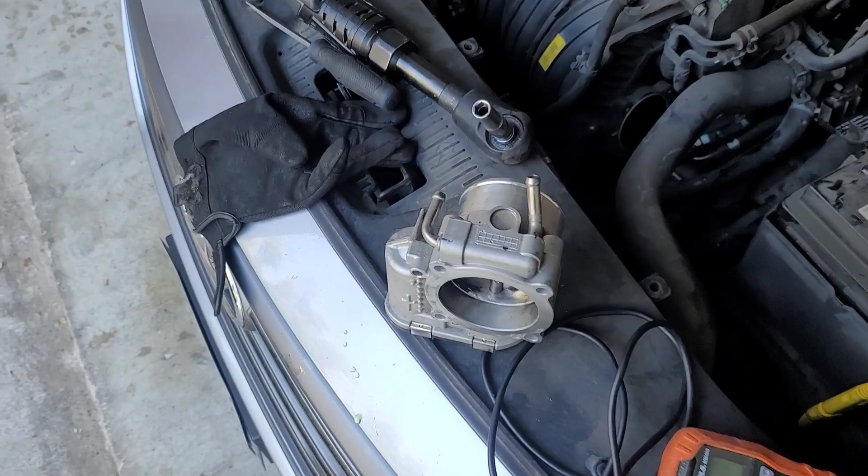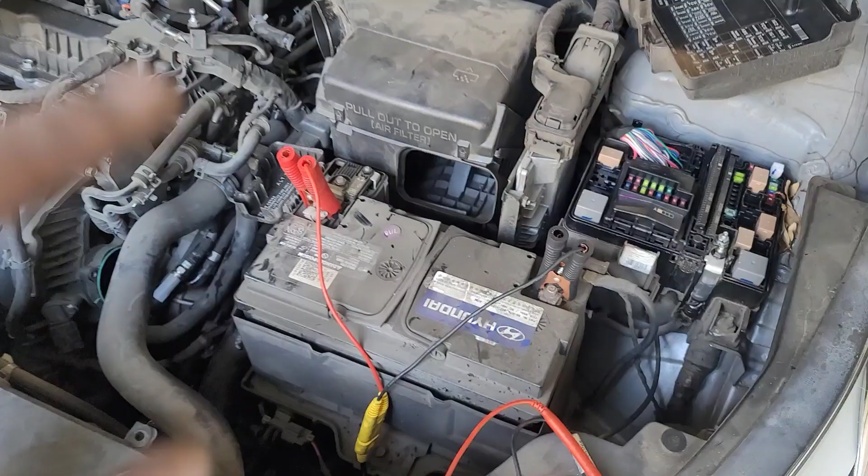Today we got a 2016 Hyundai Sonata. As you can see, it's kind of taken apart a little bit, and I got the electronic throttle body right there. And this is what we're trying to tackle today. Customer complaint is she was driving the car, all of a sudden check engine light came on, and she lost power. The car would not move past 15 miles an hour.

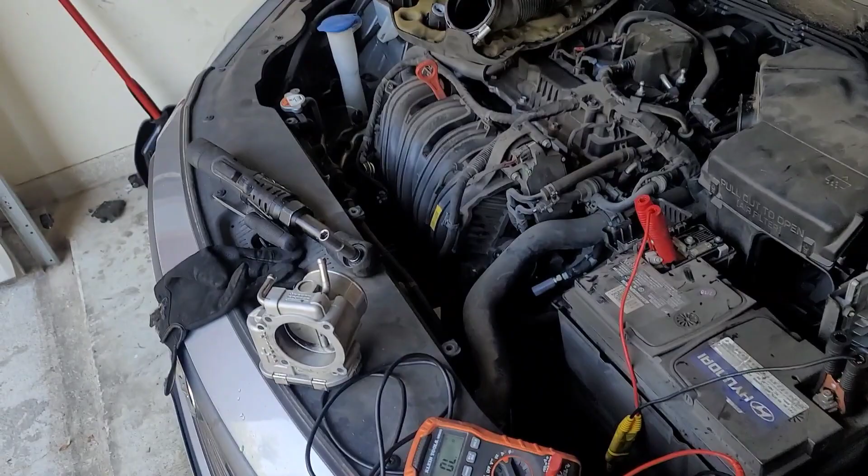So I came down there, scanned it for codes, got a P2118. So I got into service information. First of all, I did some actuation tests, and we're going to go over that very quickly. So normally, even with the car not running but ignition on, you should be able to actuate the throttle body through the pedal, of course. So when you press the pedal, you should see the throttle angle change.

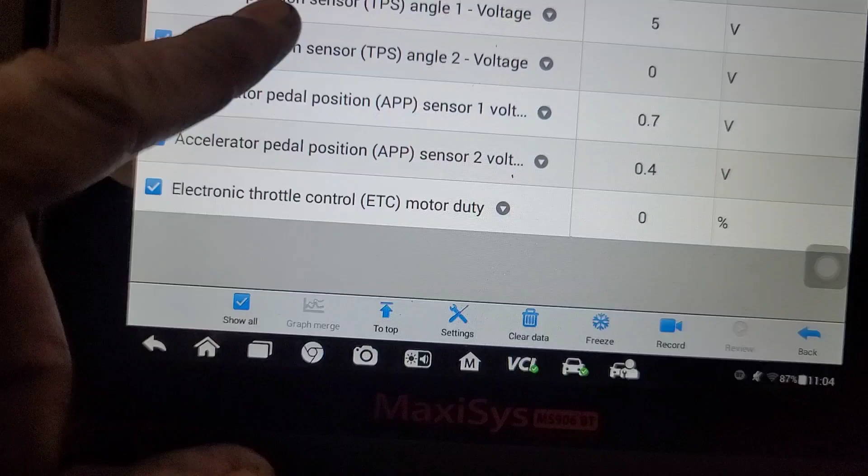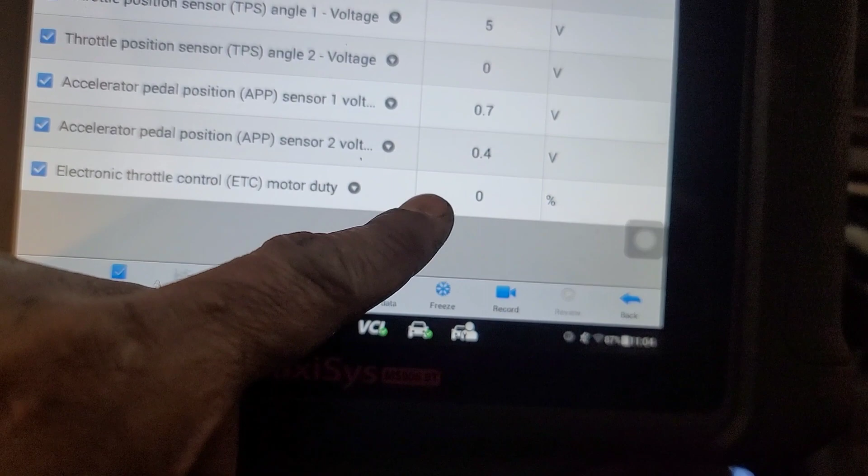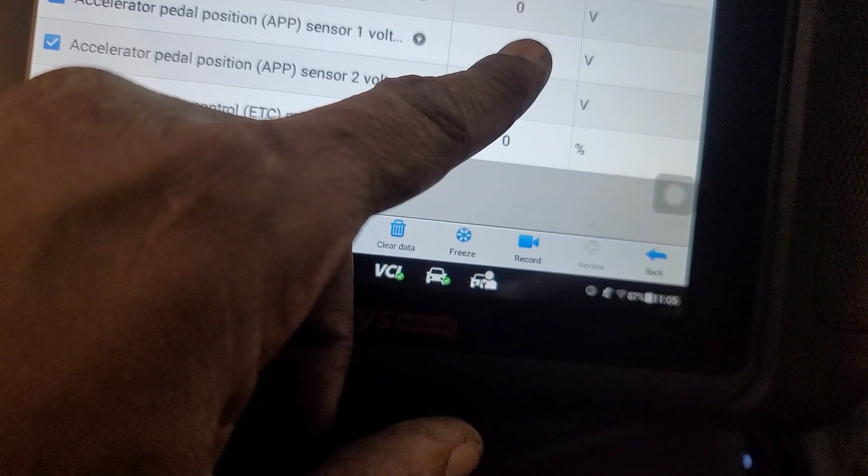So here we got all the pieces that I may need for that. I got the TPS angle 1 and angle 2, which go opposite of each other. One is starting from 5 going down, the other one from 0 going to 5. We also got the accelerator pedal that does the same thing pretty much, from 0 volts going towards wherever it's going. And okay, this is going from 0 to 2, and this is 0.4 to 2, and I think this one is going 0.7 to 5. Either way, we're going to check that out.

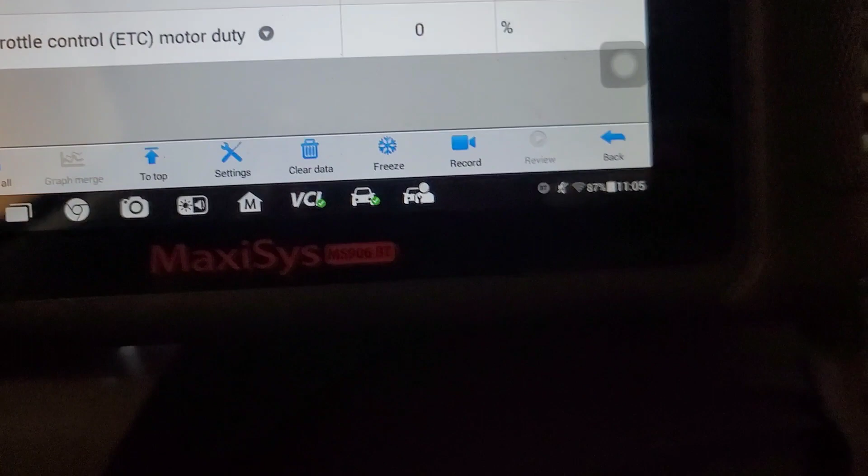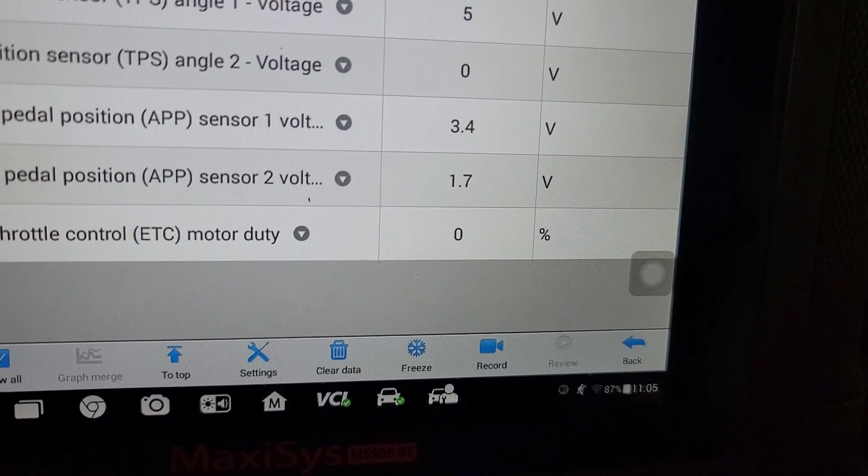And of course, this is the motor duty cycle that is actually given by the computer. So you should be able to see that the computer is telling it to actuate, and then the voltage on the angle sensor up here should change accordingly. So now I'm going to put my foot on the pedal, and we're going to watch just these two, the accelerator pedals. Look at that. Changing, right? There you go. I'm going gradually all the way down. All right. So 4 to 2 volts. This is what it is with the APP sensors, right?

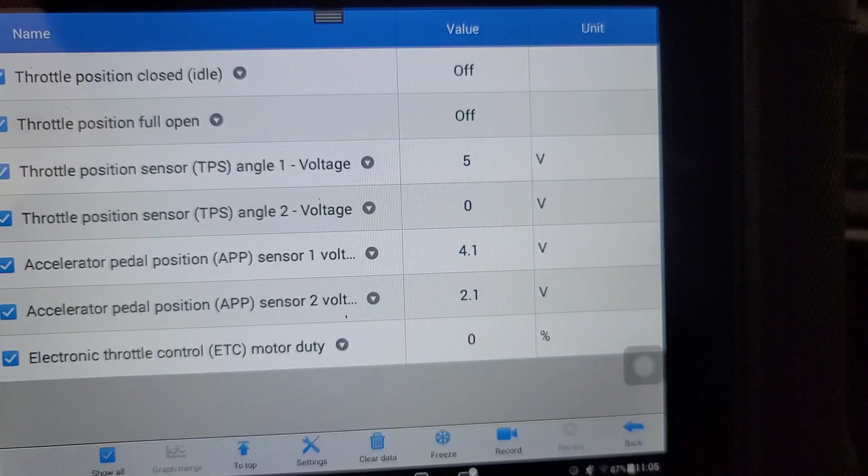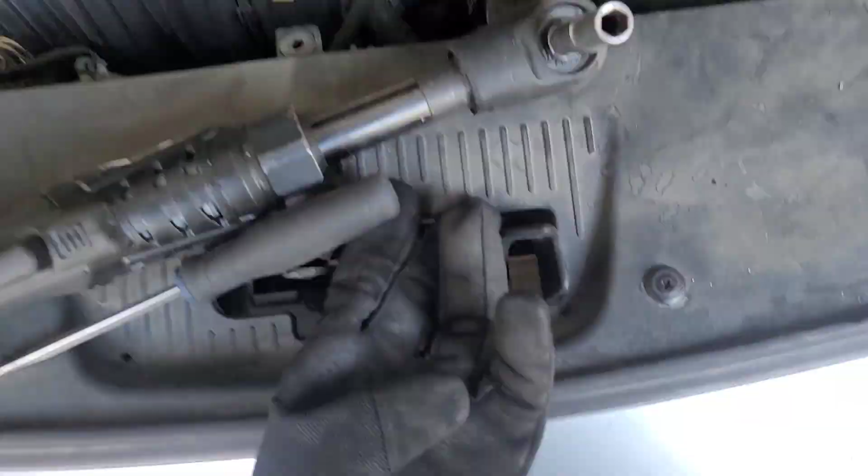Let's look over there. Nothing changes. Throttle position sensor angle 1 and angle 2. Obviously right now it's disconnected. So let me go and connect it just to show you that it's still going to stay the same. 1 second, guys. Sorry. And as you see, it's connected right there. Connector is back on. I'm just leaving it out here because I already got to the end of my diagnosis, and I'm satisfied, I think, with what I'm seeing.

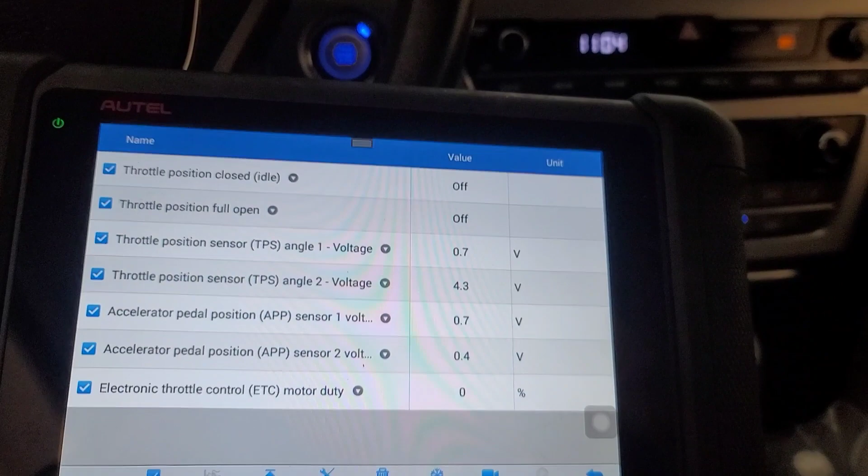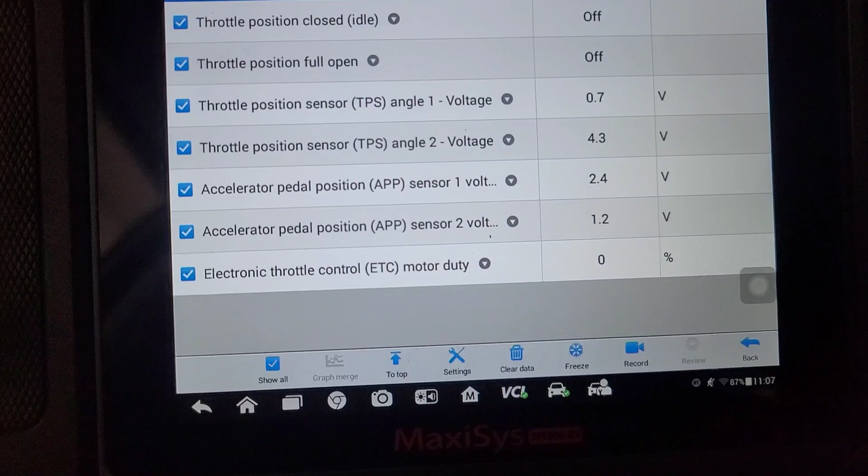Sometimes that's how you figure out the theory of operation, by just diagnosing the car yourself. Because sometimes service information doesn't give you the theory of operation like it should, with all the details that would make a diagnosis make sense to you. Anyways, plugged in. Let's do the same test. This is moving. No response here. There's no code in it, by the way. I already erased all of the codes, so that's not a variable right now. No codes.

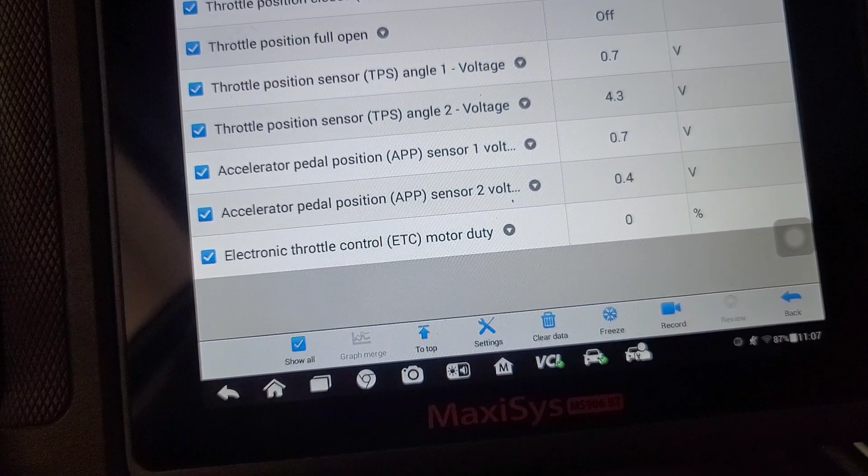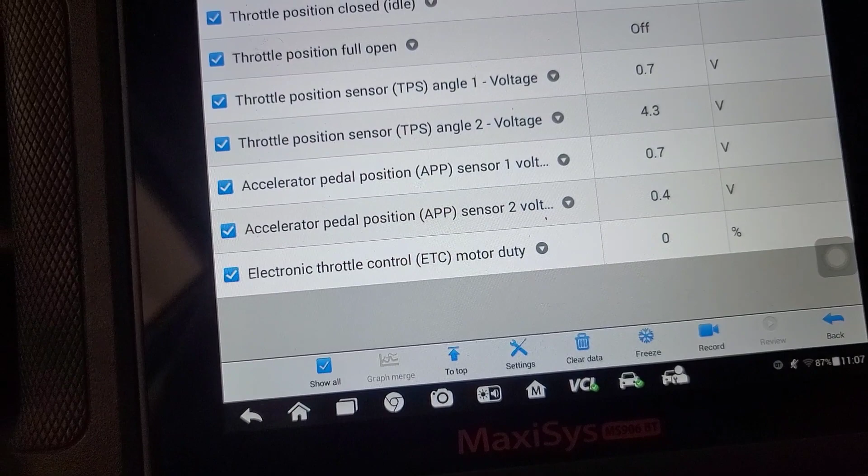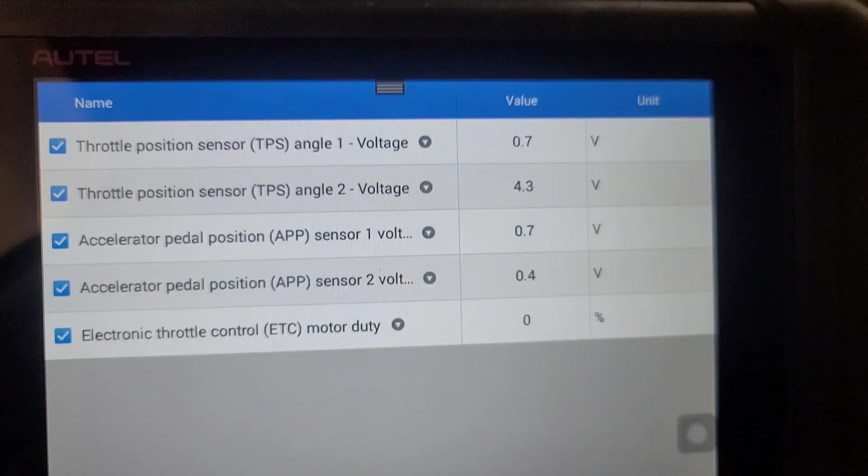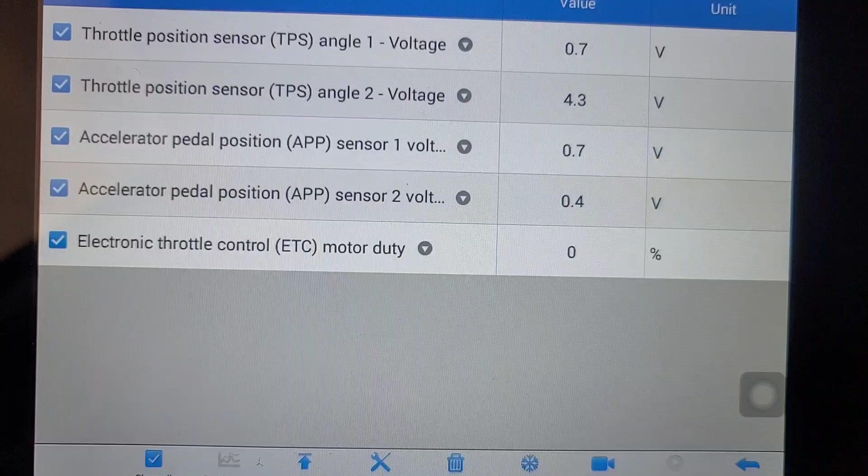Okay. My APP is working fine, so I don't have an issue on this side, inside of the cabin. So now we got only 3 situations left: a bad throttle body, a bad ECM driver, or a wiring issue. So the next test they want us to do, according to service information, is under throttle body. When I looked up the codes, I see a couple of fixes. Most of them are going to be the throttle body anyway, but I wanted to just be 100%. At this point, this code is setting right away. So what I'm interested in seeing is the ETC motor duty, which is, I believe, the command from the computer going back to that ETC.

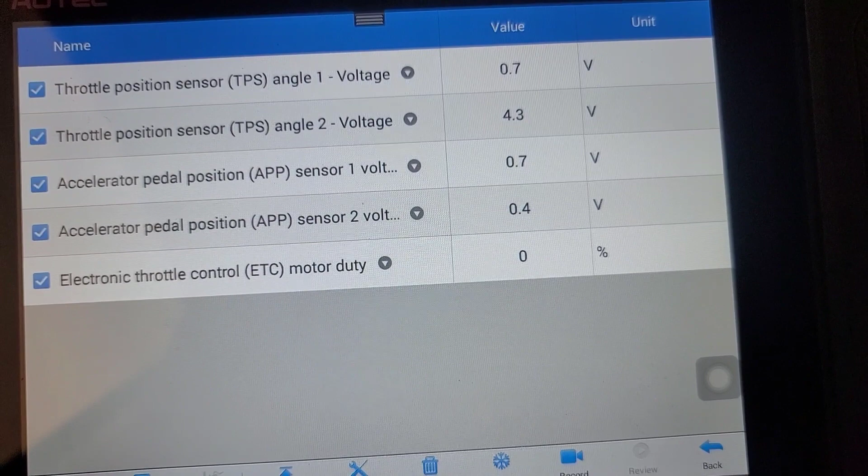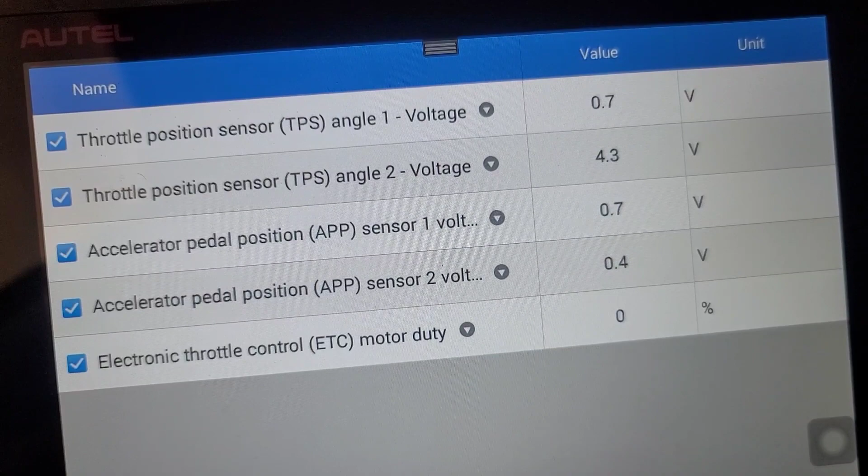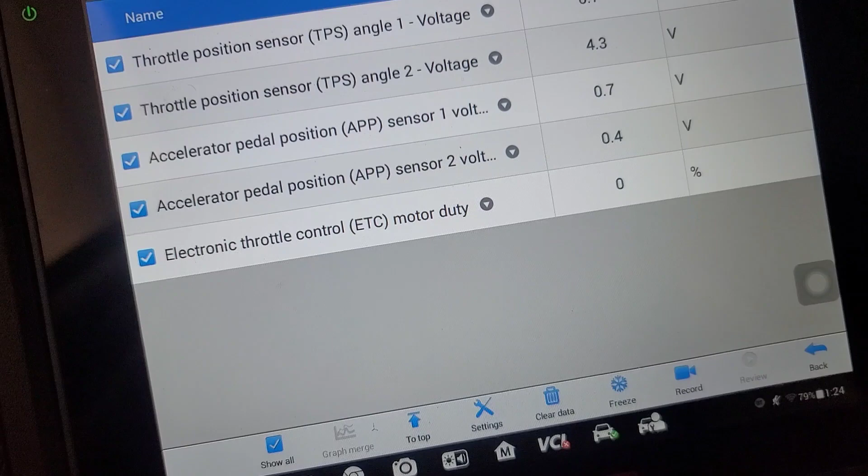Alright, so let's go start the car and see if it'll come on at all, even briefly before the code comes on. Check engine light comes right away. Right away. There's not even a delay. So could we be dealing with a bad PCM, or just a bad throttle body? I'm just not convinced. I've seen some data, but the service information is very vague when it comes to what kind of repair they want us to do, honestly. And I'm going to show you that in a minute.

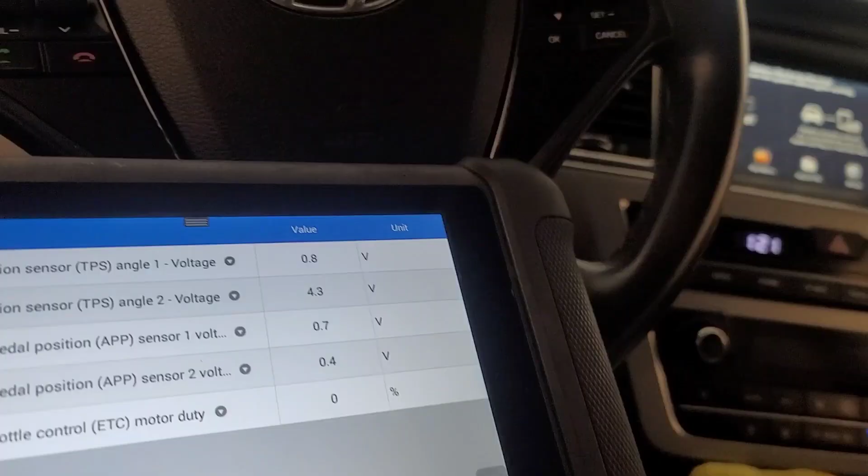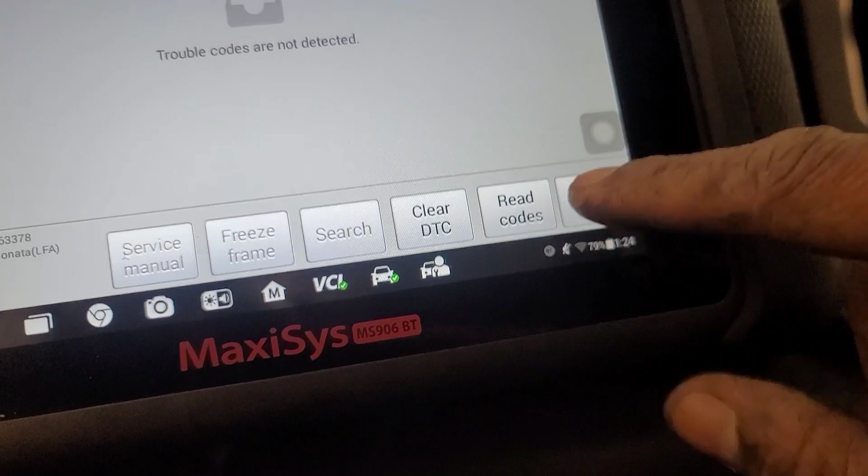All right, let's do some actuation tests and erase the codes. It's going to be those codes, P2119 probably. Yeah, 2118. Okay, so let's delete that. All right, cool. Let's get out of here. Let's go to active test. And let's go to ETC. All right, let me show you. That test is definitely working. All right, so I'm gonna go ahead and just press start right there on the actuation test.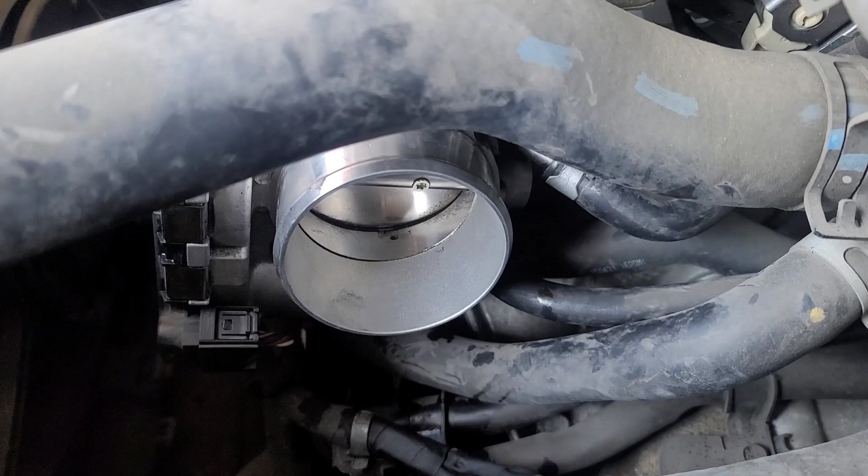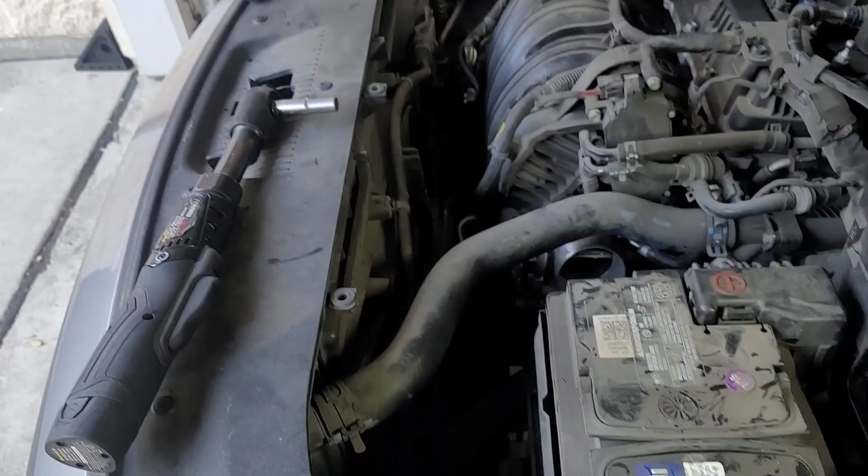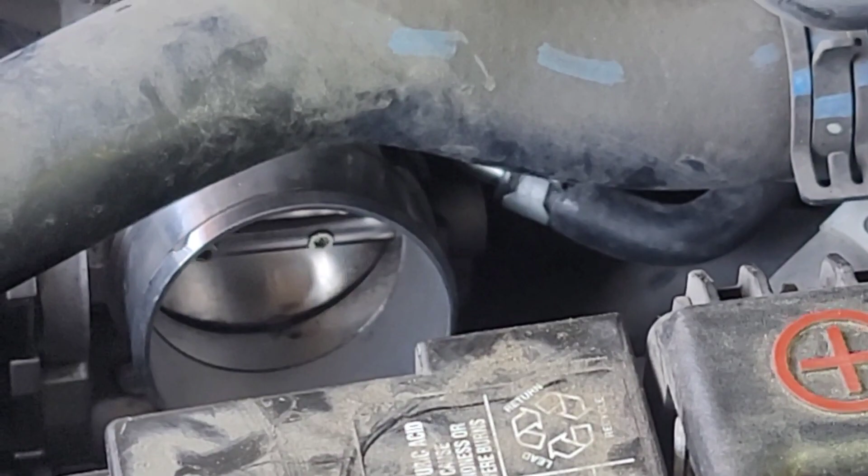So what do you make of that? It stopped on its own, so let me see again if it'll do it. Oh, now it does not want to do it at all. You know what I want to do? I want to check the voltage. Make sure I have enough voltage going to this actuator. If I do, and it still doesn't respond to this test, then I might have some other problem.

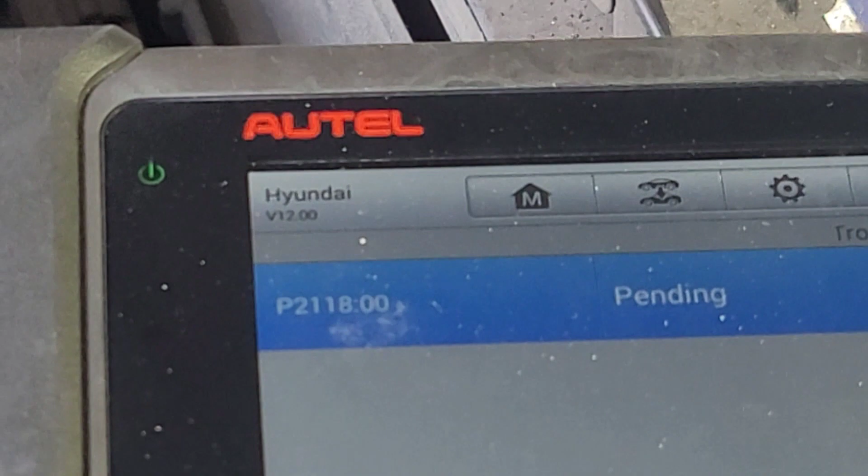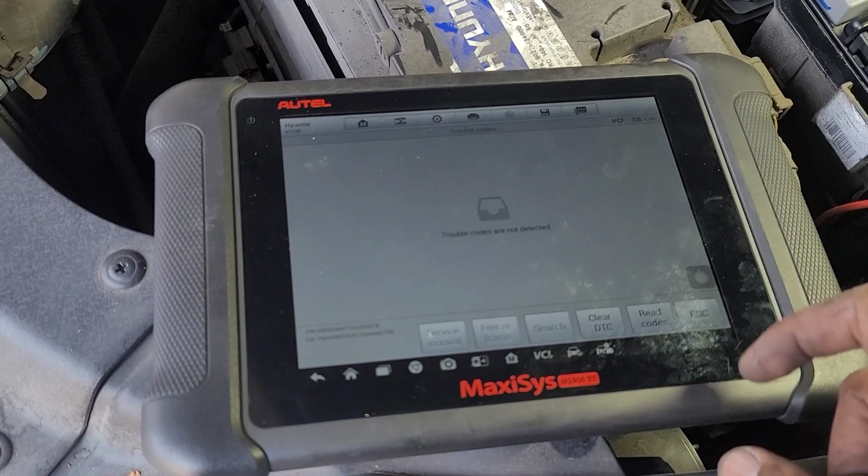Let me see if I have a code for it. There's a pending code, so it's not even there yet. So let's clear DTCs. Yes. All right, let's go to active test again. Let's go to ETC. All right, focus on there. I'm gonna let this thing just keep running and see what happens. Now it does nothing.

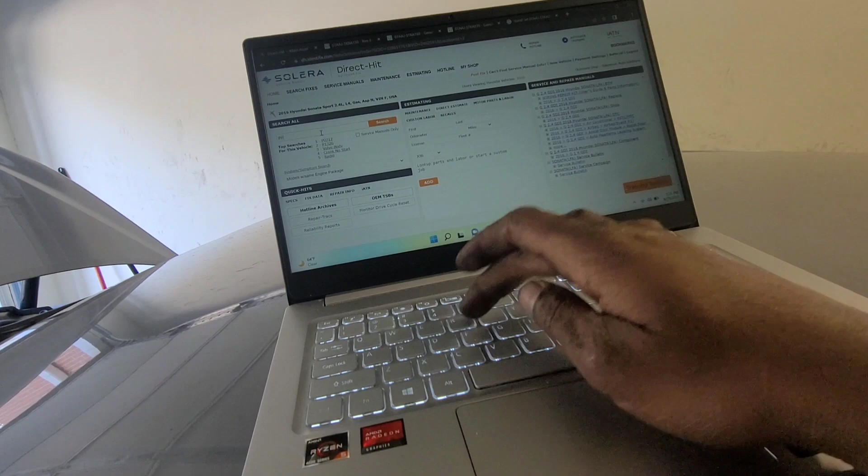All right, stop. Let's look at the wiring diagram quickly here. We might be dealing with a bad throttle body actually. That's what it looks like now. All right, let's go here. Come on, buddy. So let's look at the wiring diagram. Home. Throttle body. Let's look at the diagram or diagnostics. I think that's where the things are. No, not here. Close. What happened to the diagrams? There you go.

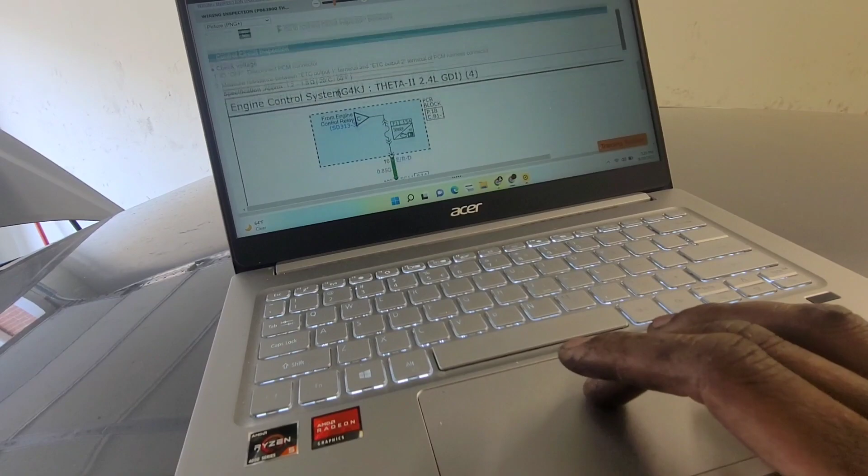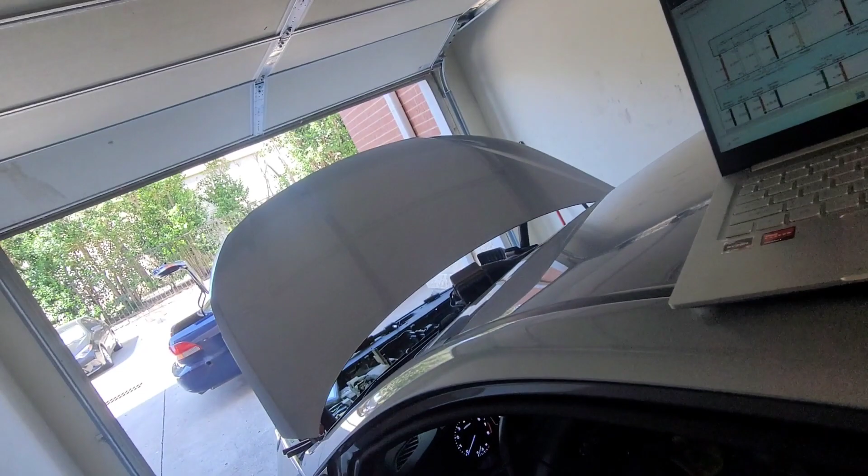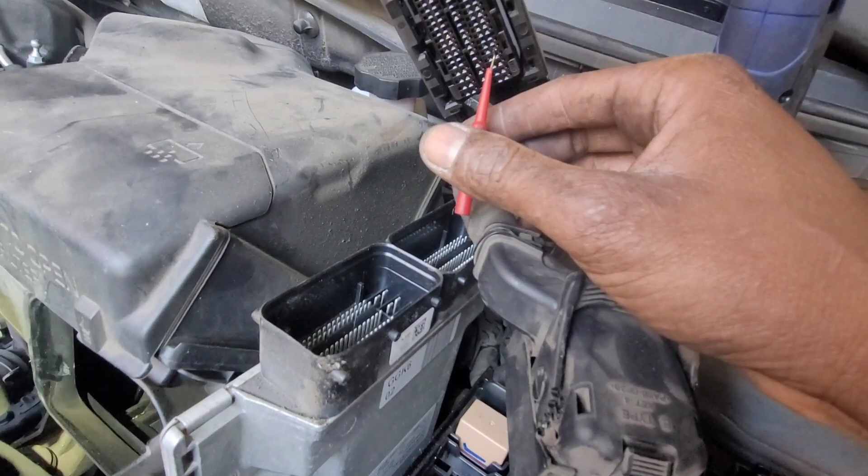So the motor is on pin 3 and 6. The power comes in pin 3, which is the white wire. So I'm gonna back probe pin 3. Let me do that quickly, guys. So look at this. This is terminal 89 and 90 going back to the throttle motor actuator, the motor itself. So we're gonna count from here: 85, 86. Look at the drag now.

So 85, good. 86, good. 87, good. See, I can't even push it more than that. 88, no problem. Look at 89, all the way down. When I get to 89, look at this. Nothing. Look at 90. Nothing. These are the power and the ground going to the throttle actuator motor.

So the dealer was doing some testing on this car before me, about 2 years ago. That's the only people who've been here. Look how loose those terminals are. I'm thinking it's probably my problem. It's not having a constant supply voltage to even turn this thing on properly. And as a result, you have all these issues because somebody stuffed the terminal in wide open and left it like that.

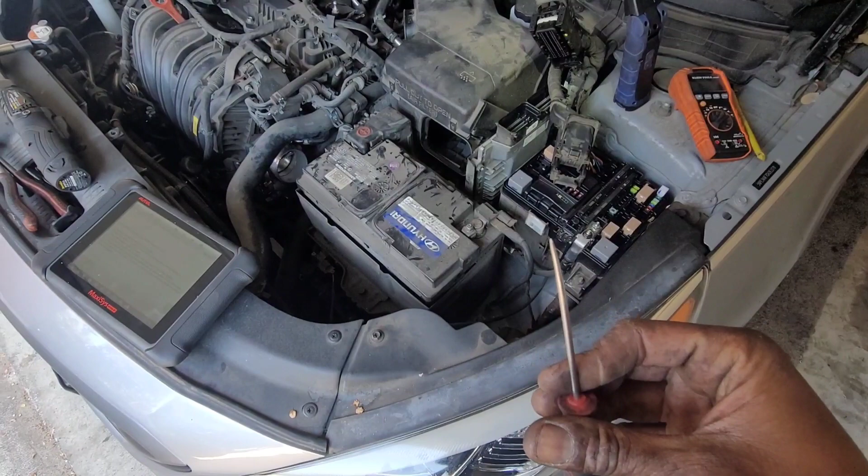So let me try to see if I can fix them with this, trying to get some drag back on it. Otherwise, what are we gonna do? I can't replace the connector. Wow, guys, look at this. This is crazy. Wow, wow. This drove me nuts.

Thank God I was able to check the resistance between those two pins, meaning between the PCM side of the motor supply voltage and ground, and the corresponding pins on the other side of the connector on the ETC. Because if I didn't think to do this test, I would never find out that this was my problem all along.

So the dealer was trying to diagnose it before; they did throw a computer on it. So at this point, I'm not even sure what's going on. Was it before the dealer, because this was a used car they bought? Then they ran into this problem, and it was early enough that they had warranty, and the dealer replaced the throttle body for free, according to the customer.

They didn't solve the problem, so they went back in and replaced the computer, and it kind of solved the problem. So I'm thinking that's all it was. Maybe they made a little bit better connection at that time, and they just rode off into the sunset. And the lady doesn't drive much. So all along, we had a pin fitment issue.

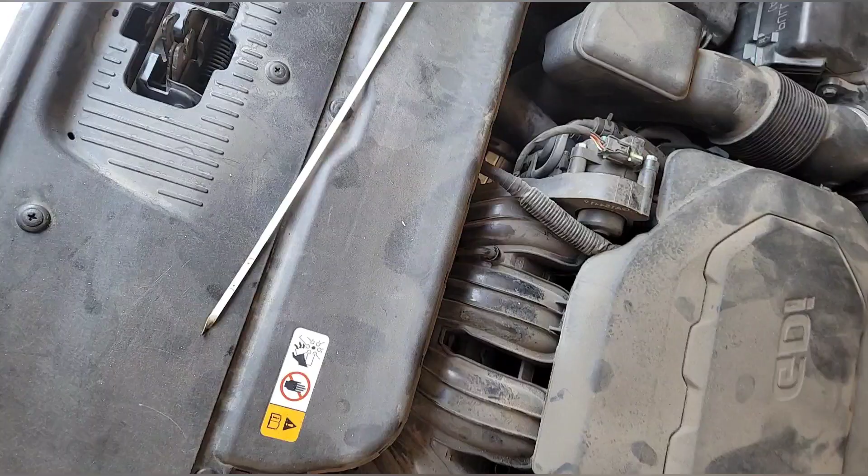But most importantly, we found out your oil is empty. This is very dangerous, because this car is known for engine problems because of low oil. Look at the dipstick. Dry. Nothing. Completely dry. You're going to ruin this engine. You've got to check your oil a lot, because this engine is burning a lot of oil, and if you aren't careful, you're going to lose this engine, man. Please.